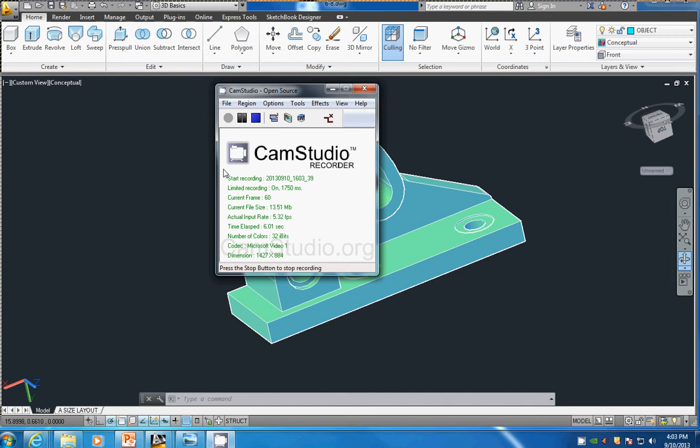Okay, in this video I'm going to demonstrate how to add the oiler to drawing 6-8 for those in mechanical drafting. If you look at the picture here, it has a little oiler there where the bearing could be oiled. For that it tells us that it's a diameter of 0.1285 drilled with a 90-degree countersink that is 0.125 deep. So what I'm going to do is create it off to the side.

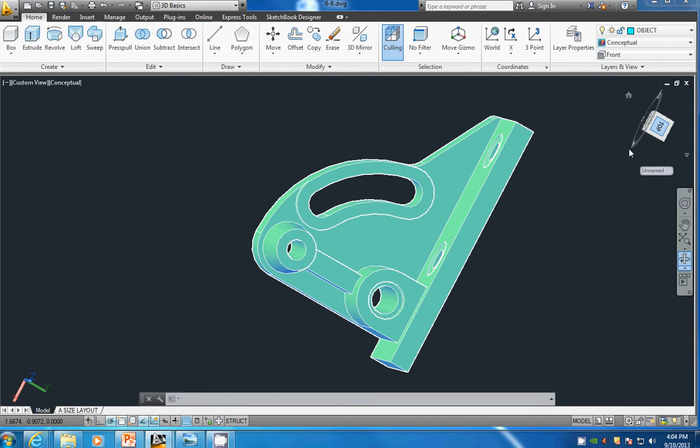If I come back in here, I'm going to square up to the top view, rotate it so it's set in about the right angle here, and off to the side once again start creating that. I'm going to draw a line that will end up coming up here and coming up out, so the distance that I start with there doesn't matter a whole lot.

It tells us that the diameter, I'm going to set this up for a revolve by the way, the diameter of the hole that goes all the way through is 0.1285. So since I'm doing a revolve, I'm going to create half of that. I'm going to make it 0.06425. Now I need to know how far to come up. For now I'm just going to come up quite a ways. And I need to calculate where my countersink is going to set at, all those types of things.

So if I come back to my picture, I can see that this is back 0.75 on this tapered portion here. That total tapered portion, if we do a little bit of math, we figure out is 1.5. So we're halfway back, which means that we'll also be halfway in between these two measurements. If I figure out the distance halfway between those, I get 1.5 plus 1.875, divided by 2. We get that the diameter of the circle at the center of this is 1.6875.

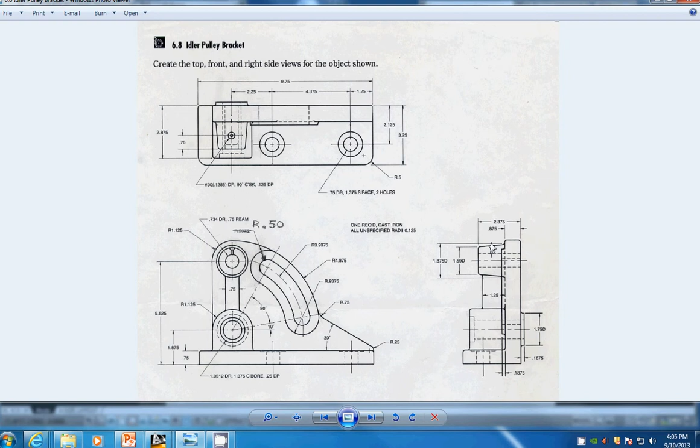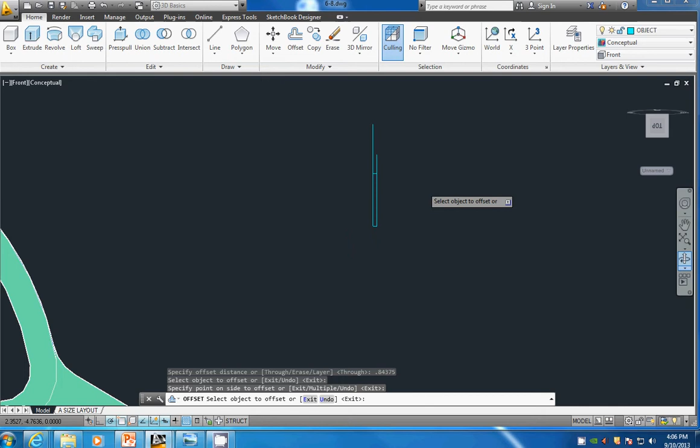Since I'm drawing that piece from the center here coming up, I actually want half of that. So if I divide that by 2, I get 0.84375. So I'm going to come back into my drawing here, and I'm going to offset. And I want to offset that 0.84375. I'm going to take this bottom line right here, bring it up. So right there is where at the center of this we exit out of this object and we're above it then.

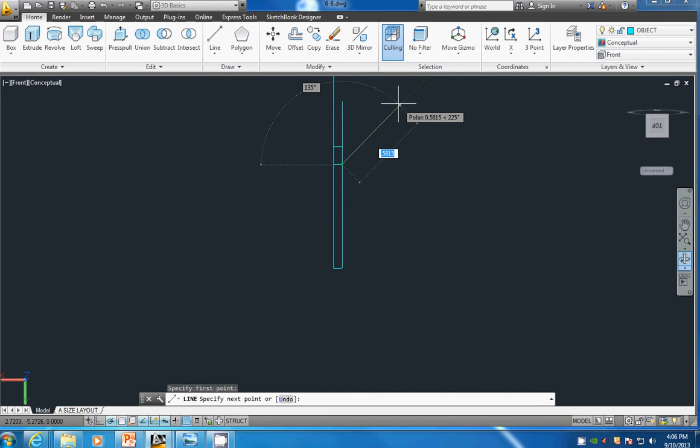It tells us that the depth on that countersink is 0.125, so I'm going to offset that back down 0.125. And that is where my countersink should start. So from here I can angle. It tells us it's a 90 degree, so that'd be 45 in either direction. So I'm going to come up here, and it doesn't really matter if I go a little bit beyond here. I'm going to come up here about like this, so that I'm obviously above my other line.

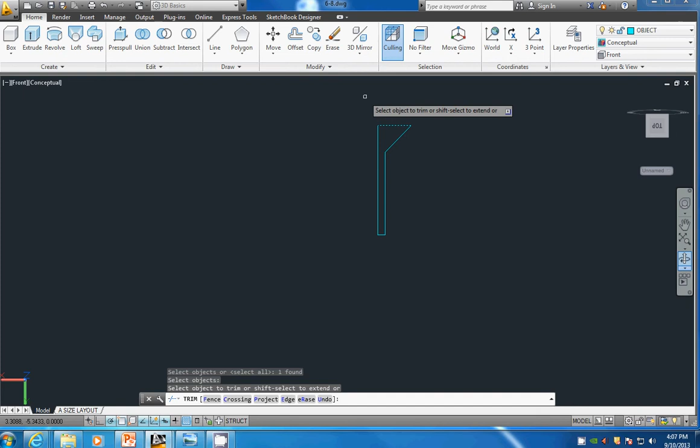Right there's my shape. I can take these lines out of here. These are construction lines. I can trim according to this one, take that one out of there, trim according to that one, take that one out of there.

Now before I can revolve this, I need to join it all together into one shape. So I'm going to type in pedit, all one word. I'm going to hit M for multiple, select all these lines, hit enter. It asks if I want to convert to polyline. Yes. I want to join them all into one piece. Enter, enter, and now it should all be one piece for me.

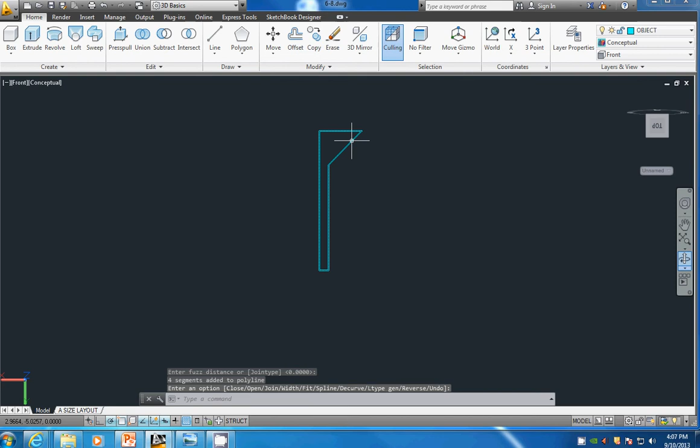I can do a revolve. I select what I want to revolve, hit enter. It says specify axis start point, so I want to revolve around this axis right here. Let's make sure endpoint is turned on for me. And angle of revolution defaults to 360 if I hit enter. So right there is my piece that's going to be subtracted out of this for my oiler.

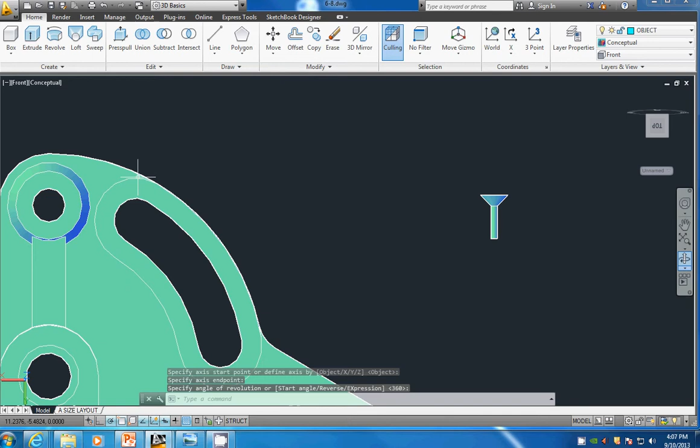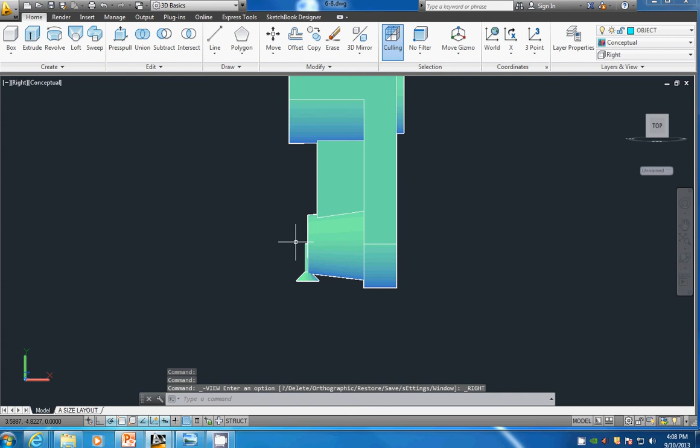So now to get it into place, I'm going to move this according to its center, and I'm going to move it to the center of this front face here. Now I know that's not far enough back, and I'm going to fix that. I was viewing front view, I'm going to now view the right side view. And it may be upside down, I can still work with that. I'm going to move this back this way, 0.75, if you remember that from the front screen.

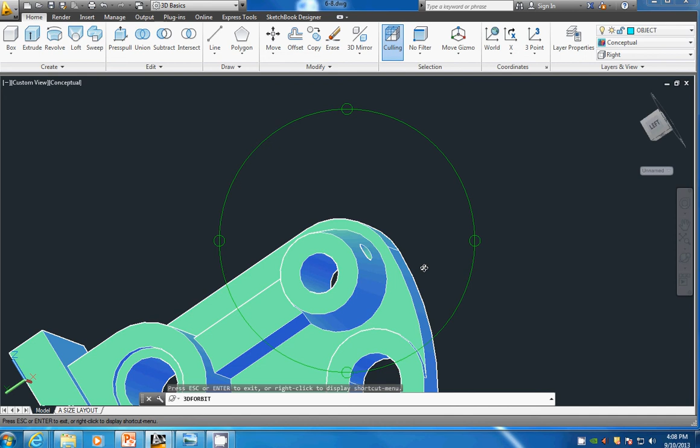Now notice that my taper sticks out of the top. That's important. That way I make sure my taper is actually there. I can now subtract from this shape, enter, that piece, enter. And now I've got that piece where my oil could be dripped in there to oil my bearing surface.

You guys can figure out how to do all the fillets that this needs. That's not the difficult part. I just wanted to show how to do that oiler. And that is it. In my next short video clip, I'll show how to put these drawings into multi-view drawings.